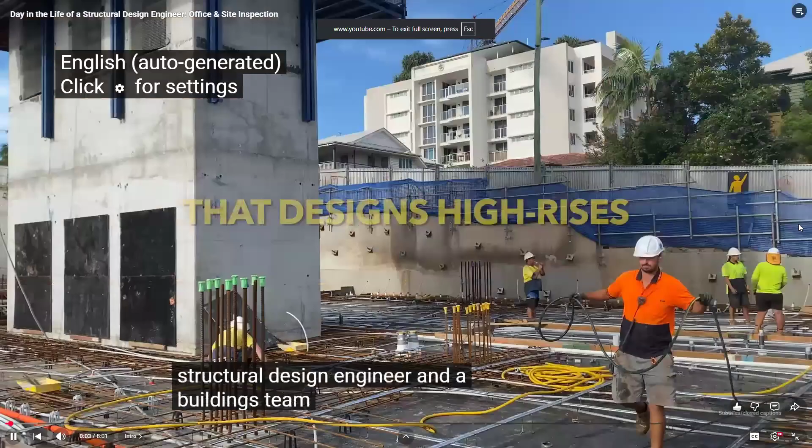This is the day in the life of a structural design engineer in a buildings team that designs high rises all the way down to residential houses. The office I work from is based on the east coast of Australia, but before I show you my day, let me

First thing to take away from this is if you ever get a job offer on the east coast of Australia, take it. Because when I look at this and where he lives and the beauty of it, I think this would be a great place to work. Plus, you wouldn't have to learn another language. Okay, so let's get going.

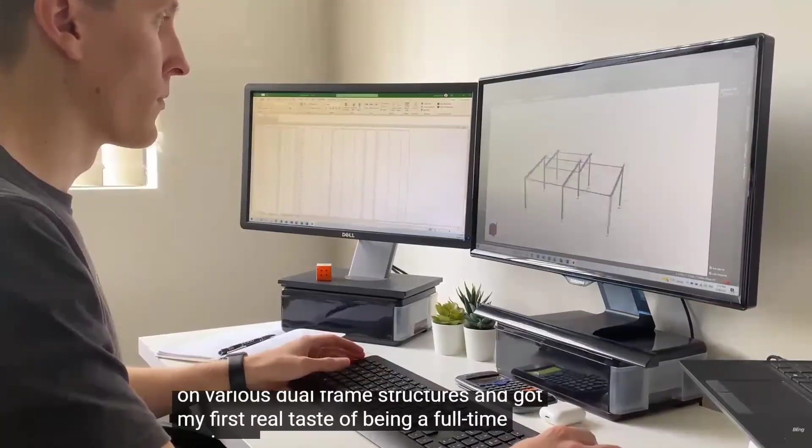In December of 2021, I graduated from a degree in civil engineering, and shortly after began working at a big local design company. At this company, I worked on various steel frame structures and got my first real taste being a full-time engineer. But after a year, I decided that big corporate lifestyle wasn't for me and that I needed a change. So I touched up my resume and started the job hunt for a new role at a smaller company.

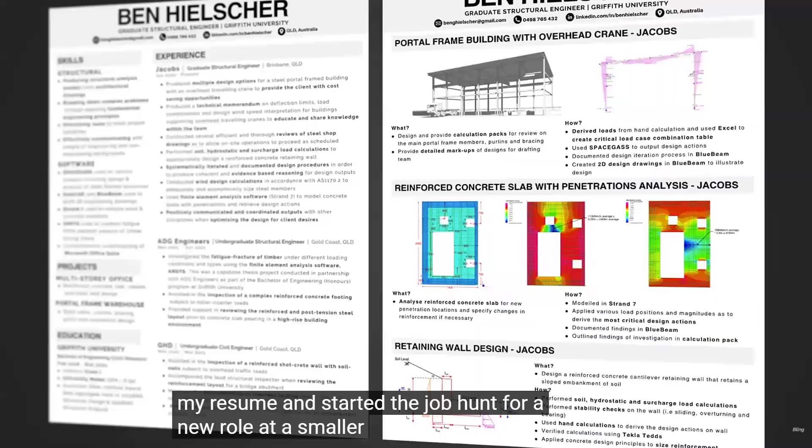During this process, I reached out to quite a few people who work at smaller companies and even got in contact with one of my old university professors who ended up passing on my resume to one of the nearby small engineering companies. Soon after, the company reached out, I sat an interview, and I eventually got the job offer.

Just a pause. I do not ever give your resume to people.

When somebody says they're looking for something, I will keep you in. I have to treat everybody fair. I can't cherry pick. Well, I think they'd be great for this company because I like this company, so I'm going to have them go there. I think these people are bozos, so I'm going to send them to these people that didn't treat me right and I didn't like them. I don't do that, okay?

So what I do is, if somebody says they're interested in our graduates, I send an email to all of you and I let you contact them. First off, in this country, I can't give your information to people without your permission anyway. All I can do is let you know of availability. So just to clear that up.

My day. In the morning, I always start my day off the same. I begin by having a quick shower, getting dressed, and making myself some breakfast. For breakfast, I usually have a bowl of oatmeal and some toast, and while I'm eating, I usually like to watch something on YouTube. After this, I head over to my desk and begin the workday.

Today, I'm going to be starting the day working from home as I've got a site inspection I need to go over later this morning, and I'm going to do it on my way into the office. As a structural engineer, it is pretty typical for me to work in a variety of places, so that means some days I work from home, on others, I'll be in the office and outside. And some days like today, it's a mix of all three of these.

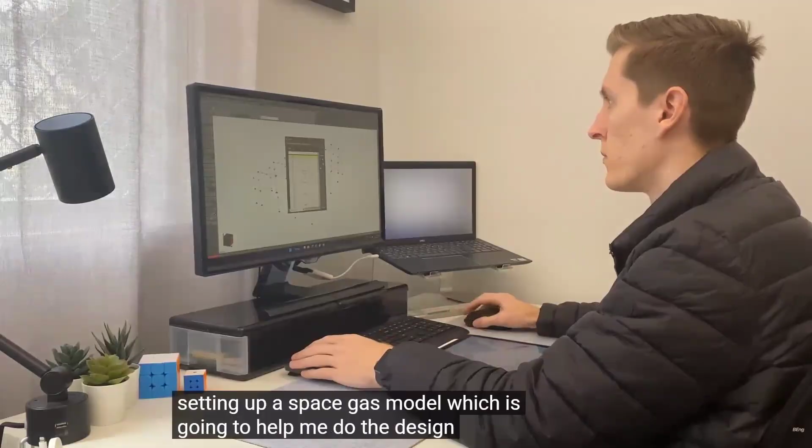Right now, the main project I'm working on is a steel portal frame building for a sports hall. And for the last couple of days, I've been setting up a SPACEGASS model, which is going to help me do the design for this project. Up until this point, this process has involved me doing things like inputting geometry, node restraints, and member properties, working out the wind loads using hand calculations and Excel spreadsheets, and also inputting all my load cases and combinations.

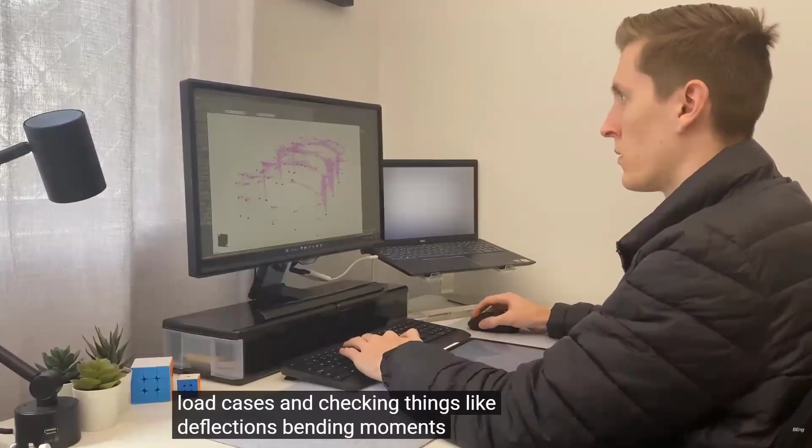And now finally, after all this prior work, today I'm going to be analyzing the design actions from this model so I can start sizing the members. Right now, I'm going through each of my load cases and checking things like deflections, bending moments, and shear forces, and trying to find which of my load cases are critical.

Nowadays, most structural analysis programs also include a design or check feature, so after I've done some sanity checks for sizes that I think work, I'm going to run the check feature and make sure that the software also agrees with the sizes I've chosen. Now, like I mentioned earlier, I do also have a site inspection I need to get to this morning, so it's time to stop working on this project, pack my bag, and get on my way.

In the office, I pretty much have a full setup minus my laptop, so I only need to transfer a couple of things with me. First, I have my big Dell work laptop. Next, I have my trusty 11-inch iPad Pro and Apple Pencil. And lastly, my calculator. I'm also planning to head to the gym after work, so I'm going to quickly pack and change clothes for this too.

And of course, because I'm heading to site, I'll also need my steel cap boots and hard hat, tape measure, safety glasses, and a high-vis vest. But I usually keep that stuff in my car ready to go. Today, the site inspection I'm going to be going to is a house framing inspection. And lucky for me, this one isn't too far away, so it's a nice, easy drive.

When I get to site, the first thing I do is change into my work boots, grab my iPad, and put on my hard hat. After this, I'm ready to go and start inspecting. Now, during a framing inspection, what I'm doing is checking...

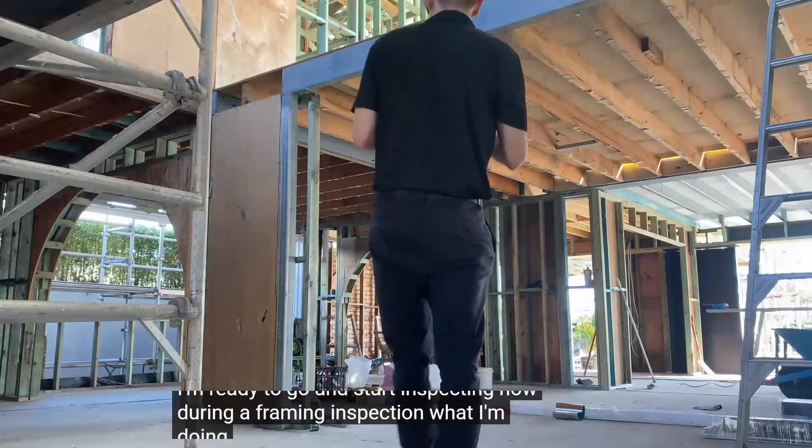I'm just gonna pause here. Those of you that have done construction, you can see there, they still have joists, whether they're ceiling joists or floor joists. They still have headers. They still have studs. So the skills that you use here are not just usable in the United States.

Now, in some countries, their building technology is a little bit different, but there are a lot of countries around the world that use the same software and the same concepts. And obviously a floor plan is a floor plan, wherever you go. So you're not just getting trained for a US specific job. If you wanted to open your mind and work overseas, what you're learning here will transfer.

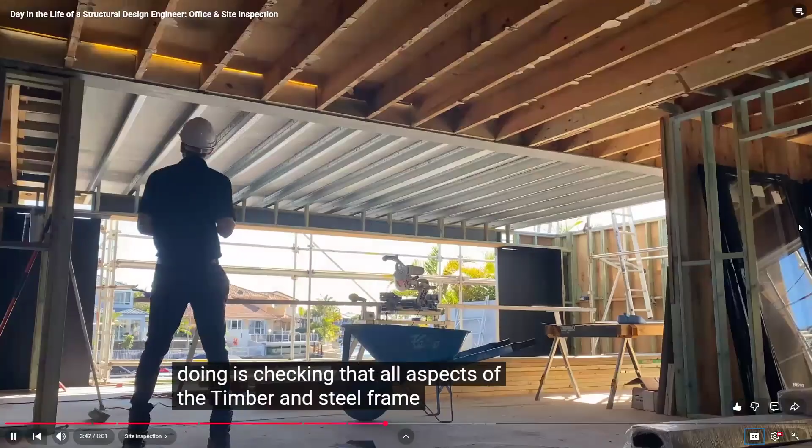All aspects of the timber and steel frame are as per the structural drawing. So that means that I need to start at the ground floor and check the wall and floor framing, then eventually go upstairs and check the roof framing.

During this process, I'm checking things like... So you can see their trusses just look like our trusses, same gang nail plates. You'll notice they did a little combination of steel joists and steel beams. There must be an addition to an existing house on this one.

This just reminds me a lot of Florida with the canals and the palm trees and everything.

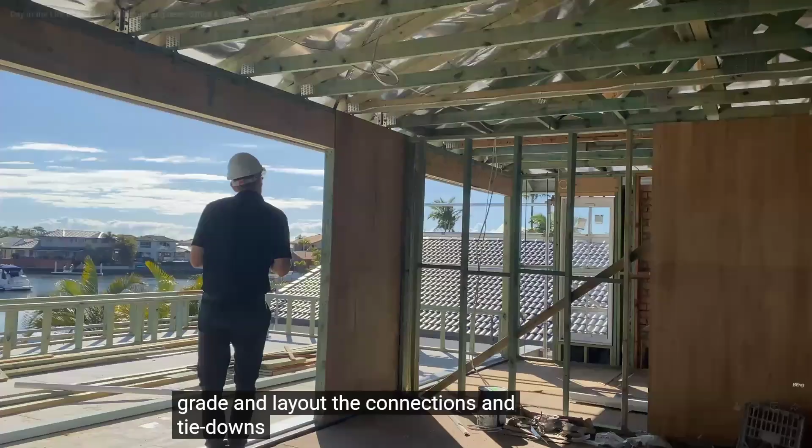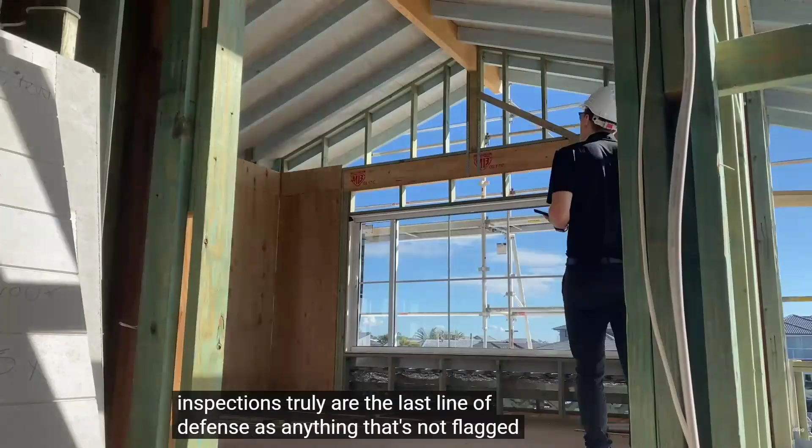Size, grade, and layout, the connections and tie downs, and also that enough bracing has been installed and in the correct locations. When I'm going around and checking all these things, I really try to be as thorough as possible because inspections truly are the last line of defense, as anything that's not flagged during this final check could result in a structural failure. A two-story framing inspection like this usually takes me about an hour and a half to complete, but by the end of that time, I feel confident that I've checked everything properly.

So the inspections, you had mentioned inspections a couple times, Todd, right? Inspections are important at certain times in the project. Now, the cities and the governments around here, depending on where you're building a house, might send an inspector out before you drywall it, so it's like a rough inspection so you can see that everything's done properly. But if you've ever built a house out in the boonies somewhere, in some of these counties, nobody will ever show up on the job site.

So you had mentioned, did they do inspections? A lot of times the government will not do inspections. There's just not enough inspectors for all the job sites to get out there. But here in La Crosse, they will inspect it quite often. So the other thing to think about is you can have all the drawings done right, but if it's not built that way, there's gonna be problems, and it's better to catch it before it gets drywalled.

If there's only 2 plies in the header and there should be 3, or if the joists have got the wrong spacing on them, or if there's not enough nails on something, it's a good idea to have your consultant come out there and look at it. Now, the problem is, a lot of times, the owners don't want to pay for the inspections. So say you're using an engineer that's working in Eau Claire or wherever, because they're a good engineer and you've got a relationship with them.

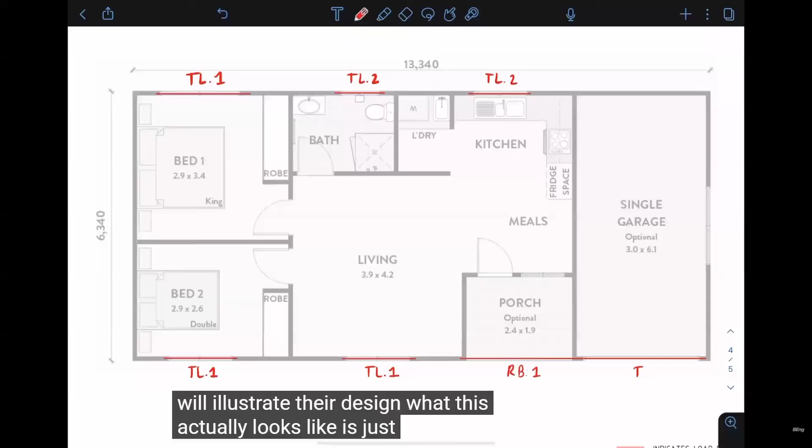For those of you that are unaware of the design process that happens in a structural engineering office, it looks something like this. First, the engineer will receive a copy of the architectural drawings and the site soil report. Second, the engineer will do their calculations and analysis using hand calculations or various software programs. Third, the engineer will illustrate their design. What this actually looks like is just 2D shapes and annotations over the top of architectural drawings, which show the different structural members and the layouts they want.

During this process, the engineer also needs to illustrate the connections and any other structural details throughout their design, so that eventually the builder knows exactly what to do. Fourth, the engineer needs to send this illustration, or what is more commonly referred to as a markup, to the drafting team. Fifth, the drafting team draws and models what we have marked up and sends it back to the engineer for review. Sixth, the engineer reviews these drawings and makes any further comments they have on the drawing. And just for reference, this is what I'm doing now.

Seventh, this back and forth process between the engineer and the drafter continues until the engineer is happy with the drawings. Eighth, the drawings are peer reviewed by a senior engineer. Ninth, any changes indicated by the senior engineer will need to be amended by both the design engineer and the drafter. And finally, number 10, the structural drawings are issued to the client.

While this does sound like a really long process, actually doing a review of a design you've marked up doesn't take too long, and that's good for me because I need to move on to my next task, which is doing a shop drawing review for a factory another engineer on my team has designed. A shop drawing review is basically just reviewing the model and drawings the steel manufacturer has created based on the set of design drawings they have gotten from us, and just double checking that they have interpreted our design correctly before the steel items are manufactured.

Okay, so this is another potential job you could get. So let's say, is there Mid-City Steel or somebody around here? Yeah. So when we do our drawings for a building, they don't just take our drawings and put them down in the factory and try to figure out where the bolts are and exactly how long all the individual beams are and start cutting steel. Okay. So what they do is they do drawings for their factory or their shop, as it's sometimes called. And those are called shop drawings.

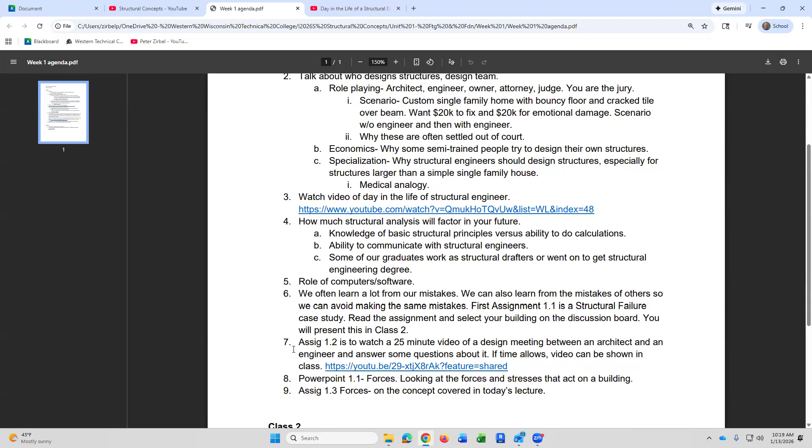So your first assignment, 1.1, which is going to be presented on Thursday's class, and I know you've got classes with Josh in the morning, so I'm going to try to give you some time to work on, is a structural failure case study. So let's show you that assignment.

So if you go to assignments on Blackboard, we're on week 1 fundamentals. You can see where we're going. We're going to build up just like a house is built. We start with the footings, we go with the floor framing, we go with the wall framing, footings and foundation first. Then we do the columns and then we do the roof framing. So that's how we're going to go through the class.

Let's look at week 1. There's a test on reading the syllabus. There's a forum on structural failure case study building selection. It's first come, first served. And only one person can do that specific building collapse. So like there's one called the Hyatt Regency walkway collapse in Kansas City, a very famous one. I'm not gonna have the whole class do it because that probably is gonna show up on the first page of the Google results and otherwise I'll have 20 people doing it. So it's first come, first served.

And what I'm going to do is I'm going to give you some time to pick it up until the break and during our break, and then we'll move on to the next one. So let's just go to talk about the assignment. So you're going to post your building selection up to the discussion board, and you're going to see the other ones that have been approved, and I'll say thumbs up or thumbs down. And then you're going to upload it up to Blackboard. So let's look at this assignment. Let me see if I can get a bigger version for you to read here. Structural failure case study. Here we go. Assignment 1.1.

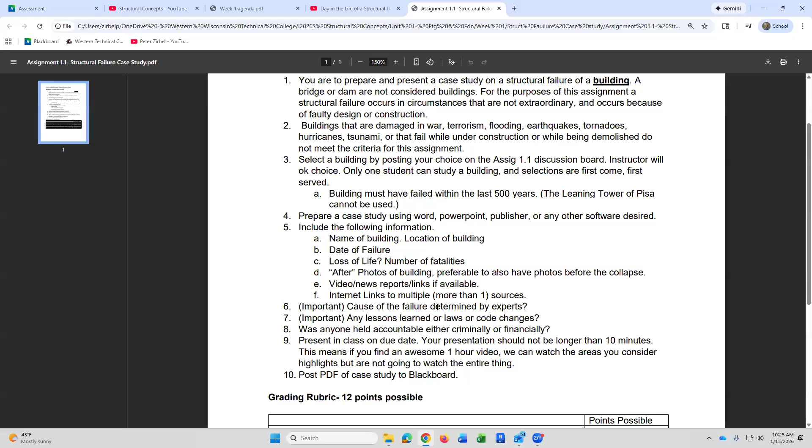And so this is how you're being graded. You get 1 point for the presentation. You get 3 points for these items here. Just check the box. Cause of failure determined by experts is 3 points. Any lessons learned or laws or code changes, 2 points. If there weren't any law or code changes because of this, just say so. Like if a balcony collapsed in Winona, they might not change the Minnesota code. Was anybody held accountable? Sometimes you can find it in the internet sources, sometimes you can't. If you can't, say, I couldn't find any information on that.

Case study PDF: layout, design, and quality of images. And I'm going to give you a hint on the layout. If you're showing something on a big screen like that, it should be left to right landscape so that it fills the screen better. Does that make sense?

Okay. So I'm going to give you a 10-minute break until 20 to 11. If you want to get your choice of buildings and put it in the discussion board, let me just show you where the discussion board is. You're welcome to do it during the break. There should be a link here that takes you to the case study. You're going to type a post using this format: year, name of building, and location. So I just made one, 1931 Elmer's Mill collapse, Onalaska, Wisconsin. I'll just type it in, and then you're locked into that one. If you're the 15th person, you have to read all the 14 before you pick, because I don't want you to pick the same one again.

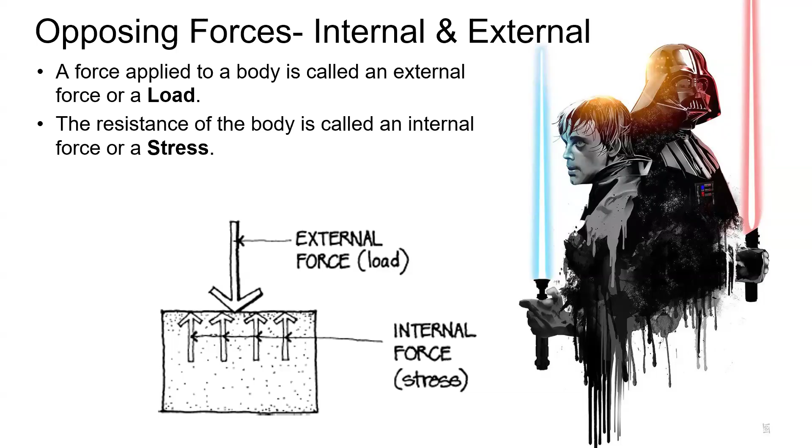Okay, so a lot of times we know how much stress a material can take, but we need to measure it by dividing the load by the area the load is acting upon. So the formula is stress equals, now you don't have to memorize this. This is an open book quiz that you're going to take on that. But the formula is stress equals the load divided by the area.

And here's an example. If we apply a 3,000 pound load to a 10-inch by 15-inch stone block, what is the stress inside the block? So we have the load, 3,000 pounds, we divide it by the area. So the area of, does everybody understand how I got 150 square inch area? What two numbers did I multiply? 10 and 15, okay?

So if I measured this here, this was 10 inches and this is 15 inches, I have 150 square inches. So if I do the math on that, 3,000 divided by 150 equals 20 pounds per square inch, or PSI. Have you ever heard of PSI before? Okay, so that's what that's doing. It's telling me how many pounds per square inch stress is being put on that stone block.

So that block is actually being compressed. We're pushing on it. It's microscopically getting smaller. So we would say that that block is developing a compressive stress of 20 PSI. If we were pulling on it, it would be a tensile stress of 20 PSI. So the PSI stands for pounds per square inch.

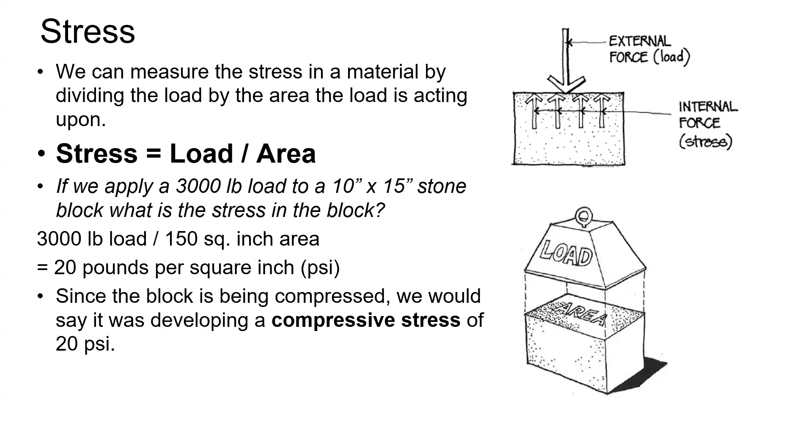So when we put a load on a body, there's another thing. In addition to developing the stress, like I mentioned before, maybe you'll be able to see it smush down, or maybe you won't, but it will smush down a little bit. And that's called strain. So strain is the change in size of a body caused by external loads. So applying external load causes a deformation. So it either gets longer if it's in tension, we're stretching it out, or it gets shortened if we're pushing it together in compression, and that's called strain.

So the thing to remember is when I put something under stress, it causes a strain where it's actually making it either smaller if I'm pushing on it or a little bit longer if I'm pulling on it.

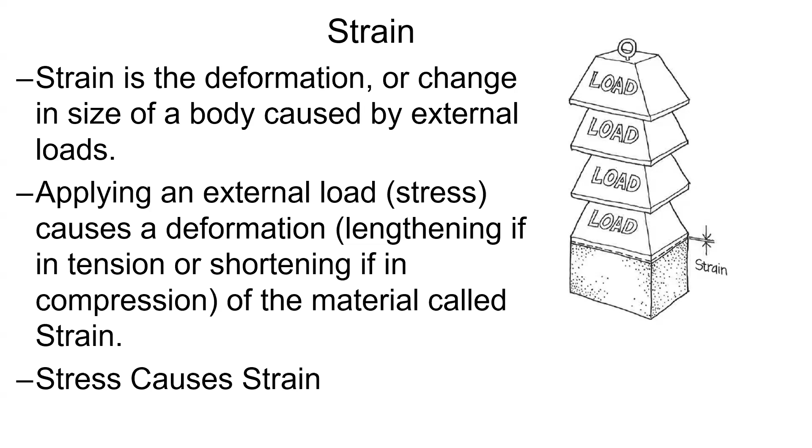So now here's a practice problem. I want everybody to get their calculator out, or a calculator on your computer, or your phone. So we measure the stress in a material by dividing the load by the area the load is acting upon. So if we apply an 8,000 pound building load to a 2-foot square by 18-inch thick spread footing. Now we're ignoring the weight of the footing and of the column.

We're saying we got 8,000 pounds, maybe it's 8,000 pounds of building and the column and the footing, but all that load, 8,000 pounds, where you see these red arrows, there's 8,000 pounds pushing on the bottom of this footing onto the dirt. And we want to know how many PSF we're pressing on the dirt, because certain soils can only take so many PSF.

Like bedrock might be able to take 8,000 PSF, but mushy clay might only be able to take 2,000 PSF. So we want to know, if we're pressing that footing that's 2 foot square, if we're pressing 8,000 pounds onto that footing, what's the soil stress beneath that footing? So I'm going to give you a couple seconds here.

And so I gave you two numbers. I gave you 2 foot square and I gave you 18 inches thick. I'm going to give you a big hint. You can ignore one of those three numbers. I'm giving you a 2, I'm giving you a 2, I'm giving you 18 inches. One of those numbers has no impact on this calculation.

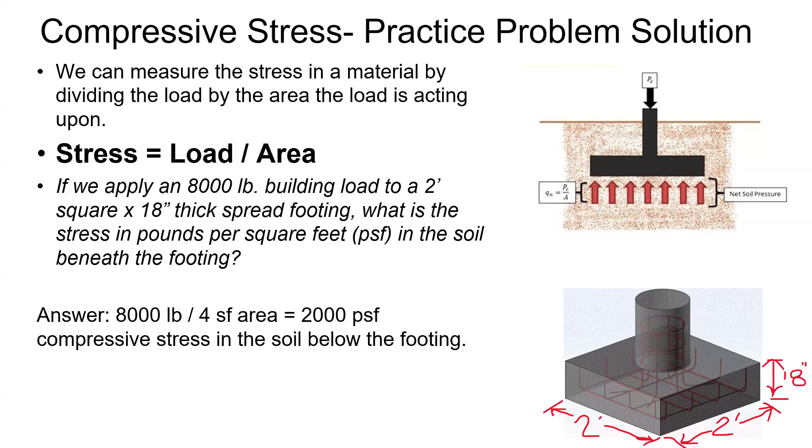Now, let's imagine my soil will only take 2,000, and that number would end up being 4,000. Say I'm trying to drop 16,000 pounds on there. I just have to make my footing bigger, right, to spread that load out so it doesn't push more than 2,000 PSF onto the soil.

Okay, so now let's talk about some other basic concepts. All forces on a building are either pushes or pulls, or a combination of the two. So a pushing force is called compression. A pulling force is called tension. When you push on a door, your arm's in compression. Because if you can imagine, if your arm was made out of silly putty and you pushed on a door, your arm would get shorter.

If you pulled on a door, your arm was in tension. If my arm was silly putty, I was the plastic man, and I pulled on a door, my arm would get longer. So that's pushing and pulling. So in a tug of war, this is a simple example. Is that rope in compression or tension? Let me say the answer out loud. Tension, right? Because it wants to get longer. They're pulling on it, that rope's in tension.

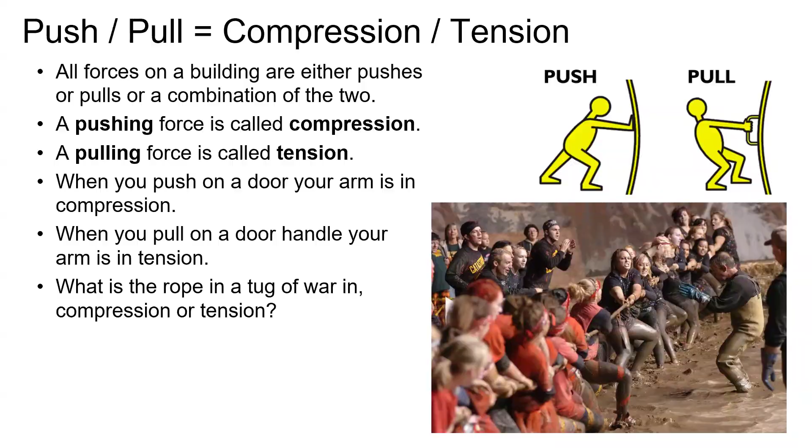Now we're gonna use some building elements. Parthenon's columns. Are they wanting to get smaller or longer because of the loads on them? So are they in compression or in tension? Compression, right? Because the weight on the top's kind of mushing them. If they were made out of silly putty, it'd be mushing them smaller.

So this is one of the famous building collapses. I don't know if anybody's picked it. The Kansas City Hyatt walkway collapse. It had a walkway that was held up by steel rods. Are those steel rods in compression or in tension? Tension. They were hung from the roof. And that's where that walkway was held on.

How about the stones in an arch? Are those in compression or tension? Compression, right? Because they're pushing down, they want to get made smaller. What about the cables in the Golden Gate Bridge? Tension, right? Because they want to get stretched longer under the load.

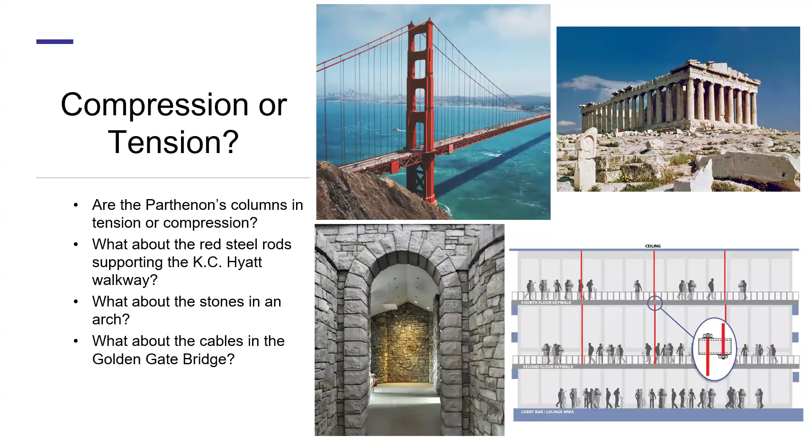Okay. So now, just like we did compressive stress before, we're going to do a case study or an example with tensile stress. And the only complication I'm adding: stress equals load divided by area, that's still the same, but I'm gonna do a circle.

So this is a bridge that's held up by cables from this mast here, and those cables are in tension, and so we need to calculate the tensile stress on those cables. So I want to know what the unit stress is created when 6 tons is suspended. I'm going to say they're rods, or they could be cables, on a 1/2-inch diameter steel rod.

So let's look at the math here. Stress equals load divided by area. So we know what the load is, 6 tons, a ton is 2,000 pounds, right? So we know the load is 12,000 pounds. So here's 1 ton equals 2,000 pounds, 6 tons equals 12,000 pounds. So that's the number that's going to be in the load part of it.

Now, we have to figure out the area of a 1/2-inch diameter circle. And so I'm going to do a little bit of math review here. How do we find the area of a circle? Pi r squared.

Do you ever watch the Three Stooges? Okay, so they have a little skit where the guy's a teacher or professor, and he's like, well, pi r squared. And then one of the Stooges goes, no, pi r round. Because you don't make square pies.

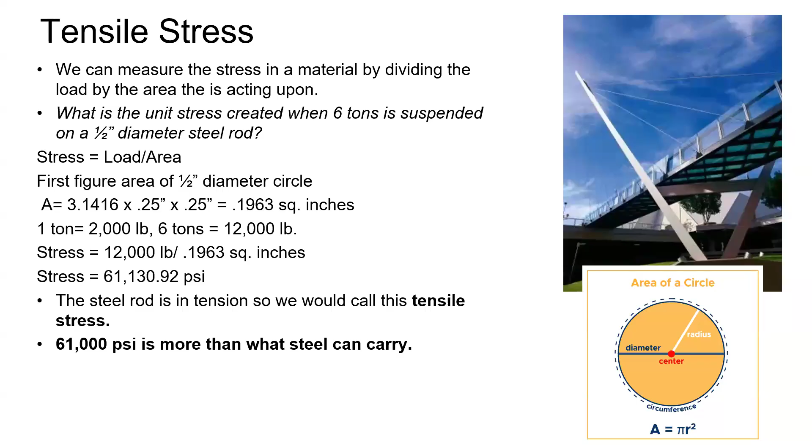So that's why, again, if you think about liability and getting sued and all that, whoever's doing these calculations for that bridge, or like the bridge going over the Mississippi, they need to know these calculations have a factor of safety and a margin for things rusting and all that. We would never size it up to the breaking strength of steel. We would always leave ourselves a factor of safety. But that's how the math is. It's a very simple calculation, but what messed students up was they wouldn't calculate the diameter properly on a circular shape.

So if you think you have an answer, I can see my next slide here. I'll see if you're in the ballpark or not. I know everybody's pi is different on their calculators, so I'll take that into account. So raise your hand if you want me to check your answer. So this one, we're going to end up with an answer in pounds per square inch.

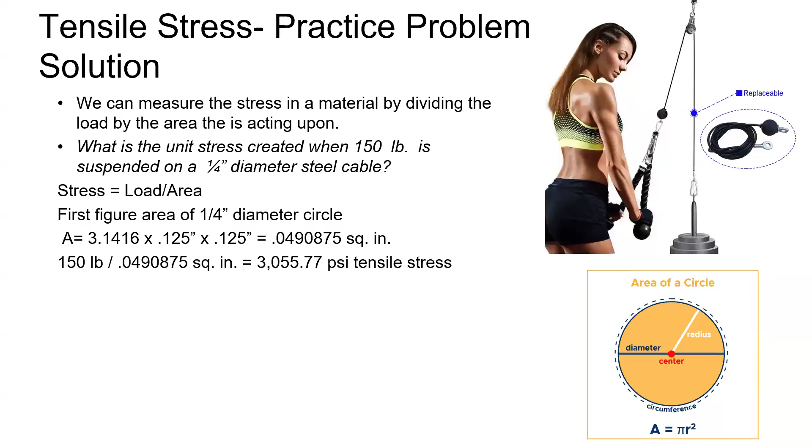Okay, now let's talk about strength of materials. Strength of materials is resistance to breaking, and it's measured by the stress. So above those stresses, the material will break by snapping in tension or crushing in compression. So now we know what PSI means. Remember I told you in materials class that concrete is terrible in tension. That's why we have to put steel into it. Remember all that? I see you nodding, so I'm glad you remember that.

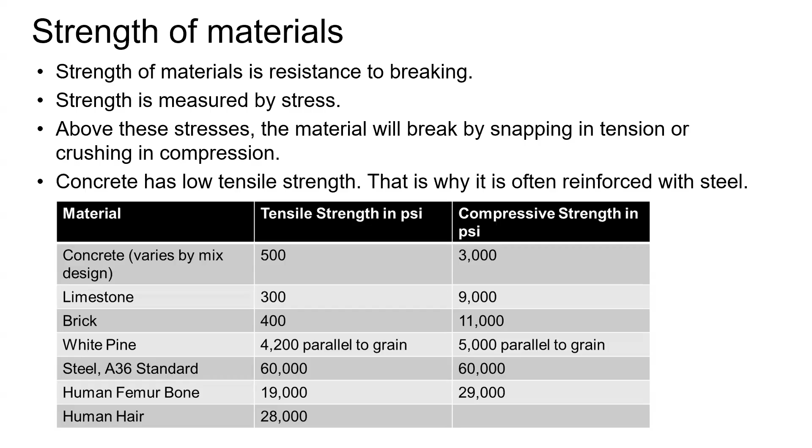And I know they've done tests on spider webs in tension, and it's pretty amazing what some of these natural materials can take. So you can see why we have to do reinforced concrete, because if we have any tension in that member, we're going to have problems with unreinforced concrete.

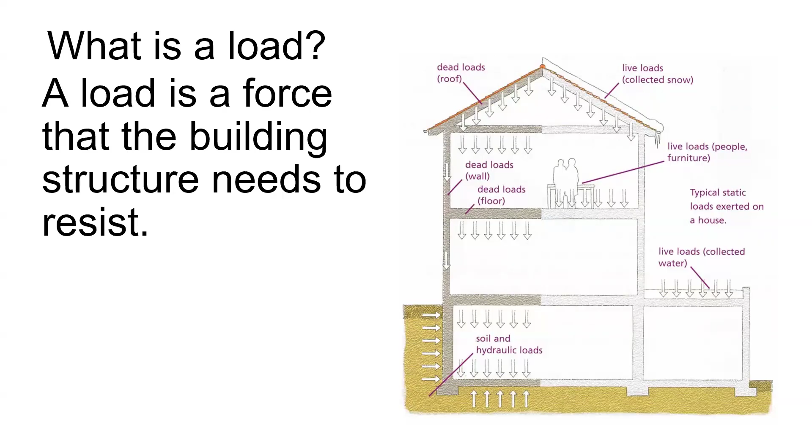So what is a load? A load is a force that the building structure needs to resist, and they are divided into dead loads and live loads. So the dead loads are parts of the building and things that are permanently attached to it that don't move. So the walls are a dead load, the floors are a dead load, the roof structure is a dead load. All that's dead because it doesn't change and it's part of the building.

The live loads are things that are applied onto the building that can move. They're live. So all us people, we're live loads because we could all go and stand in that corner packed together as tight as we could, or we could spread out here. We could have this room totally filled with people, or we could have no people. So it changes, right?

Same thing with rain loads. You could have no rain ponded on the roof of your building, or if all those roof drains clogged up, we could have a foot of water out there. Okay? We could have no snow on the building, or we could have 6 feet of snow on the building. So that's a live load because it changes. But the building has to resist both dead and live loads.

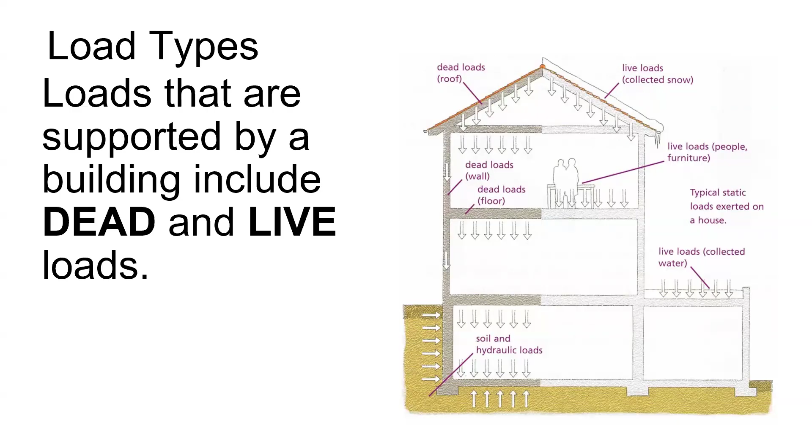Typically, you calculate the dead loads on a house with rules of thumb. So like a 15 pounds per square foot load typically covers a floor dead load and a roof dead load. But on a commercial project, the engineer did calculate it because it wasn't as standardized as the house is. Like this floor could be 2 feet thick of solid concrete, or it could be that hollow core precast concrete, or it could be concrete with pans in it, like I showed you over at the Com Center.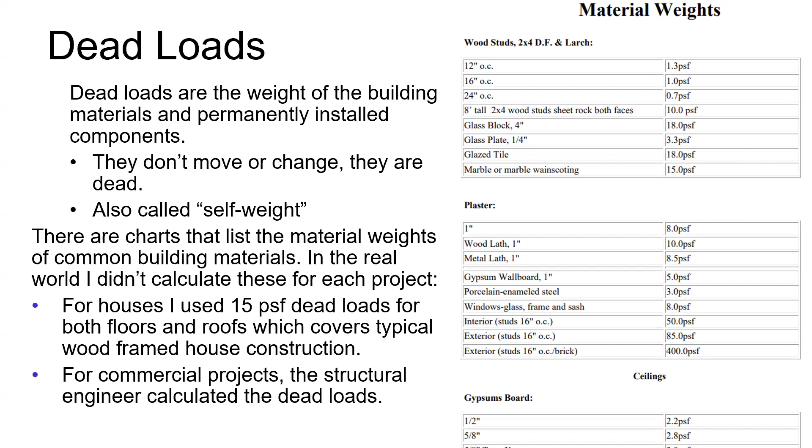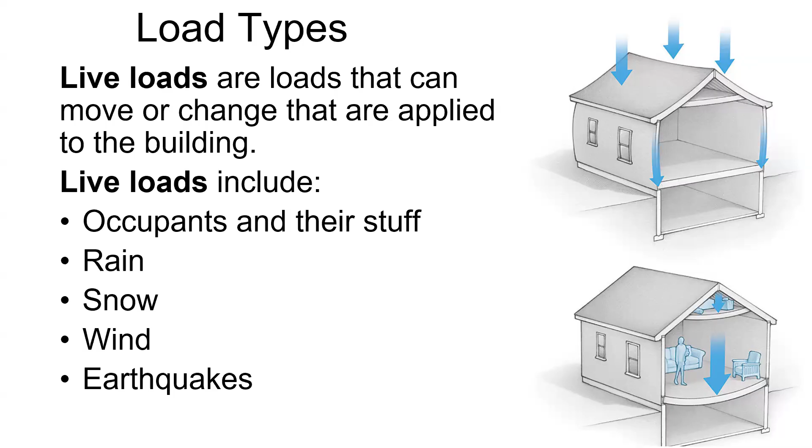So the engineers will actually calculate how much your building weighs. They will calculate the dead loads for you. So we know now dead loads are dead: building, things permanently attached to the building, doesn't move around. The other one is live loads, includes us and our stuff, rain, wind, snow, earthquakes. They're loads that change and can move. So your building is designed to take a combination of dead loads and live loads.

So where do we find our live loads? We look them up in our friendly building code. So a floor has a different live load than a roof. Now this is a live load for floors, but they're given in pounds per square foot, right? PSF. So here, let's look at an example. A movie theater assembly lobby has a live load of 100 pounds per square foot. A residential apartment has a live load of 40 pounds per square foot.

Why does the code make you do 2.5 times more load on a movie theater lobby than in an apartment? Say it's a movie everybody wants to see and they're all waiting for the movie because there's only so many seats available. That might be standing room only. It might just be packed in there. You could hardly walk through it. So you have to have a higher live load because you have so many more people packed into it.

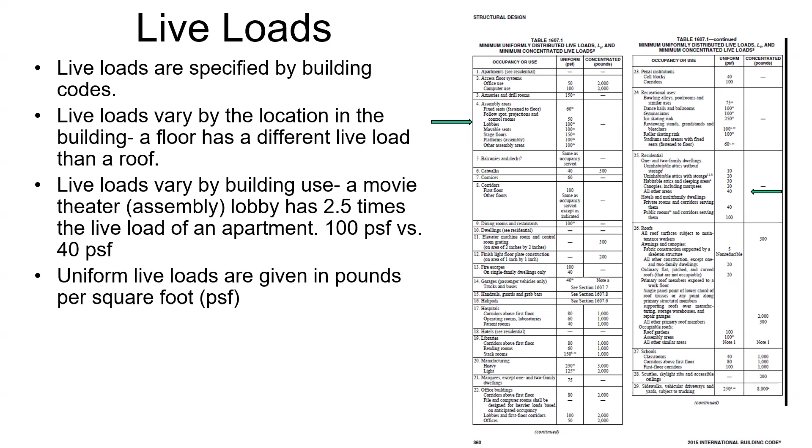So you see, if you have an assembly building where a bunch of people are gathering together, our live loads are going to be much higher. You can see here on fire escapes, if there's a fire, I guarantee you that fire escape's going to be packed with people. So that's got a live load of 100 pounds per square foot. So the code will tell you what live loads you need to use for what kind of building you're doing.

Do some math. So they said a 30 by 30 foot area with 50 people in it collapsed.

Why do my monitors keep switching off? Okay. Is everything constantly going on and off? Just started. The Zooms are still good, okay.

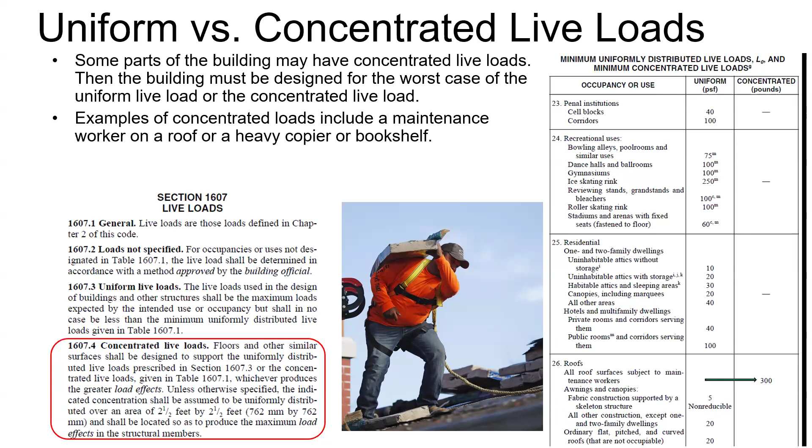So when the engineers design your building, they're not only looking at your distributed live load, they're trying to figure out, is there going to be a concentrated live load? Like, for example, if I'm doing a factory, let's imagine we had forklifts or that little lift out there, right? That lift that's going up and down to service the green wall. That's going to be a concentrated load, right? Because that's not like a normal load spread out over a big area. That's a big, heavy piece of machinery rolling around. And I'm hoping when they designed this building, they designed it for that concentrated load going around.

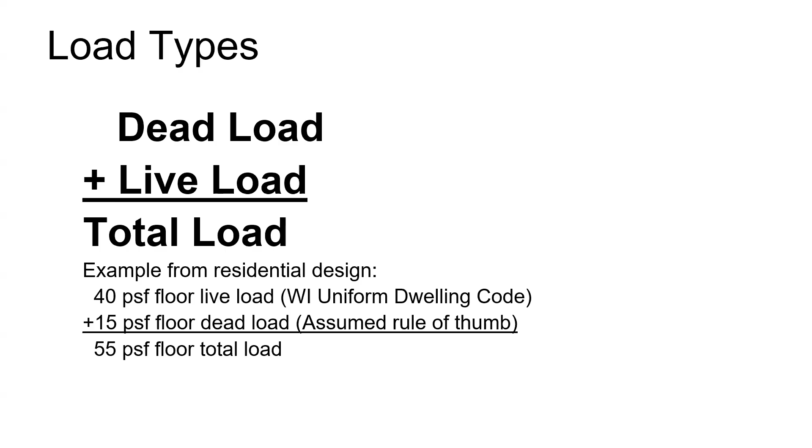Okay, so let's talk a little bit, get it down into houses. The Wisconsin code, and we'll have a code assignment in the second 7 weeks here, is 40 pounds per square foot live load from the Wisconsin Uniform Dwelling Code. I typically assumed a 15 pounds per square foot dead load for a wood frame floor for a house. So when I was designing my floors, I took the dead load plus the live load, and I ended up with 55 pounds per square foot when I did my calculations. Okay. 2 more slides.

Gravity loads are downward uniform forces on all structures. So the weight of the building, that's always going down. It's not ever pushing off to the side because all of us are being pulled by gravity. That force goes to the center of the Earth's core. So if you're in Australia, you're still going downward to the center of the Earth's core.

So there are such a thing called lateral loads, which produce a sideways motion. So if I have wind that's blowing on the side of the building and it's wanting to tip the building over, that's a lateral load. Lateral means sideways. If I have earth, like on my building foundation wall in my basement, that's pushing that wall sideways. That weight of that dirt wants to tip that wall over into the basement. Okay, so that's a lateral load. Earthquakes move buildings in all directions, but since buildings are typically weaker side by side, they are designed for earthquake lateral loads because that earthquake can shift the building left and right as it shakes.

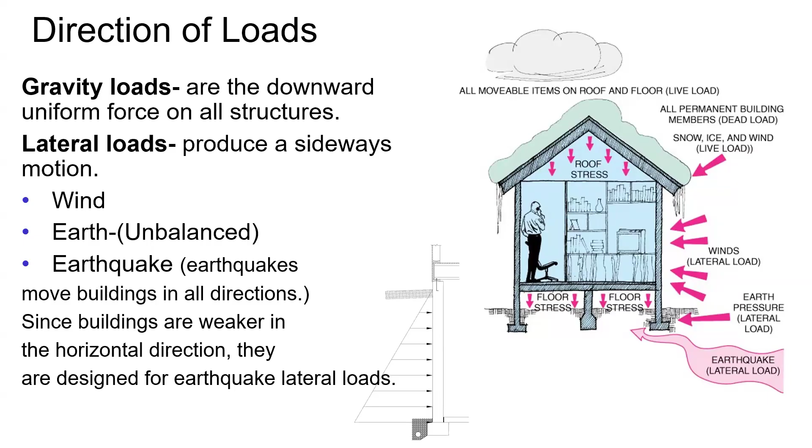Now, this might kind of freak you out, but believe it or not, wind can pull up on a building, and it's called uplift. So wind can create a negative pressure suction, which creates uplift on a roof. And here's a little diagram. So as the wind comes over the roof, it kind of makes the shape like an airplane wing, and that creates lift, just like that shape of an airplane wing creates lift with the wind blowing over it. So it will actually lift things off of your building in a high enough wind. So if you look out this window here, you're going to see we got a bunch of rocks out on our roof there.

That roof is a loose laid ballast. That's ballast on our rubber roof. The rubber roof is not glued down when there's ballast. It's great because there's no screws, there's no holes, there's no glue. It's just laid out there.

If we didn't put the stones on there and there was a strong wind, it would balloon up just like a balloon because that suction would suck it up. And it would look like half of a balloon out there. There'd be like a big tent of that rubber roof, and it would eventually stress the roof and fail it. So this is an exaggerated shape, but that roof would want to pull up in that low pressure area from the wind going over the roof.

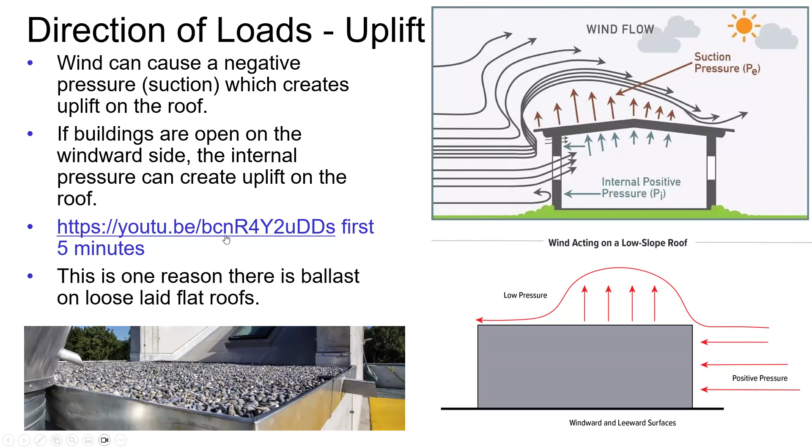Crap. Okay, I'll find another version of this. Maybe later we'll show it to you.

Okay, so let's show you the assignment for this, and then I'll let you work on all your assignments. You have a structural failure case study, work on that first. This assignment is just a Word document, and then you just answer the questions on it. Now, there's a fair amount of questions, but they should be fairly straightforward if you have that PowerPoint open and look at the examples. So let's just click on that to show you what it is.

So I have you figure out some load things, load divided by area, figuring all that out. I have you figure out whether these things are dead or live loads. Remember, dead loads are the building and things permanently attached to it. Live loads are movable items that change. And then I want you to answer whether these forces on the building are gravity, lateral, or uplift.

Okay, so that's due a week from today. So do not do this now. You should probably be working on your structural failure case study, or you can go home, I suppose, if you want, but I'm gonna give you the rest of the class for work time. Any questions? And then there's that one little assignment about watching that video of the design meeting and answering a couple questions on it. Okay, that's all I got. Thank you.

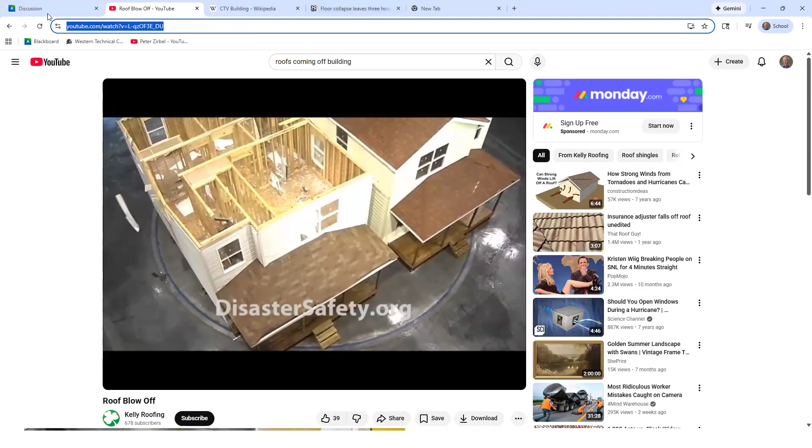Okay, so I got. So Duncan, just so you know, it's Hyatt, like the Hyatt Hotel. Hyatt. Yeah. Message coming in. Thank you. Did it work this morning and it just stopped? It didn't work?